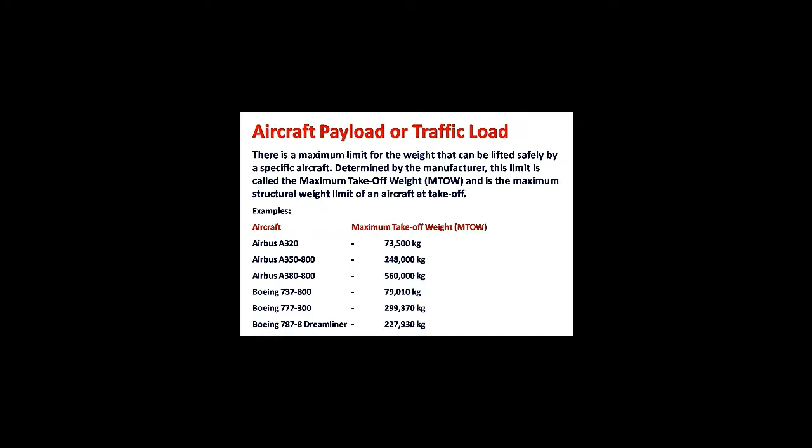There is a maximum limit for the weight that can be lifted safely by a specific aircraft. Determined by the manufacturer, this limit is called maximum takeoff weight (MTOW) and is the maximum structural weight limit of an aircraft at takeoff.

Let us look at the maximum takeoff weight of different Boeing and Airbus aircraft. Airbus A320: 73,500 kg. Airbus A350-800: 248,000 kg. Airbus A380-800: 560,000 kg. Boeing 737-800: 79,010 kg. Boeing 777-300: 299,370 kg. Boeing 787-8 Dreamliner:

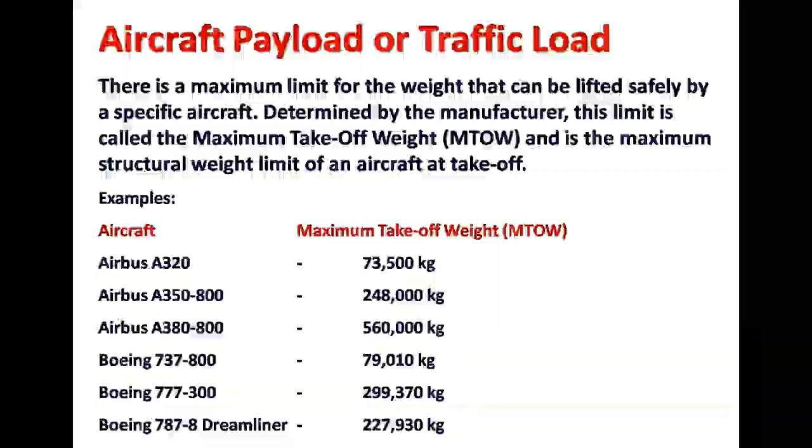227,930 kg. Other structural weight limits of an aircraft are: maximum zero fuel weight is the maximum weight of an aircraft, dry operating weight plus the total load but without fuel, means zero fuel. Now let us look at the weight limits of the aircraft.

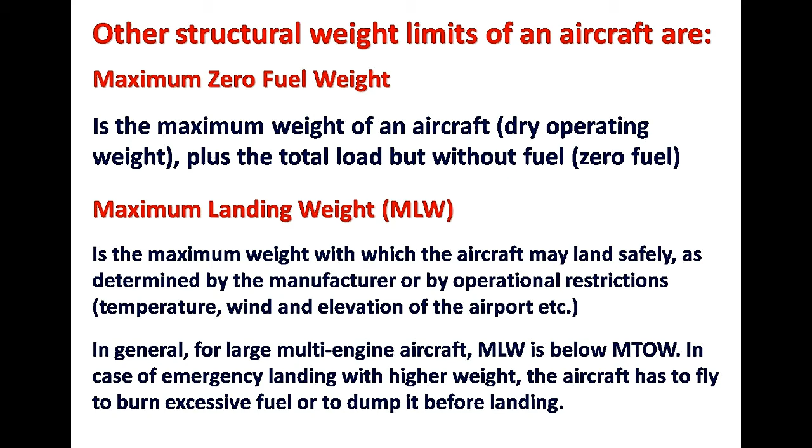In case of emergency landing with higher weight, the aircraft has to fly to burn excessive fuel or to dump it before landing. Now let us look at the aircraft's fuel loads. Ramp fuel: the total amount of fuel on board the aircraft before departure, means taxi fuel plus takeoff fuel.

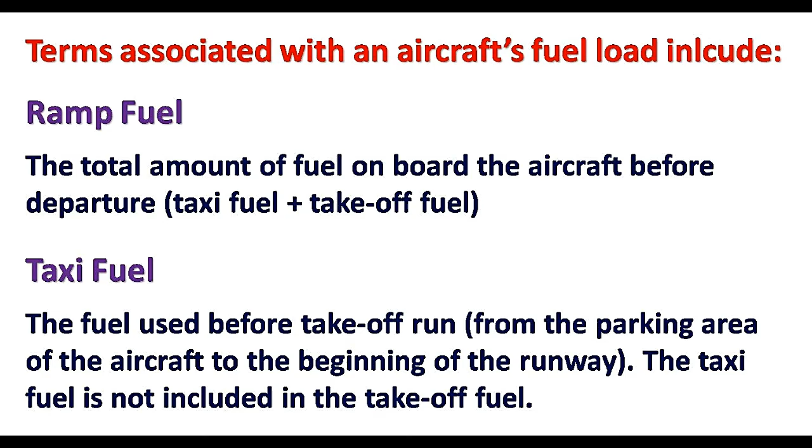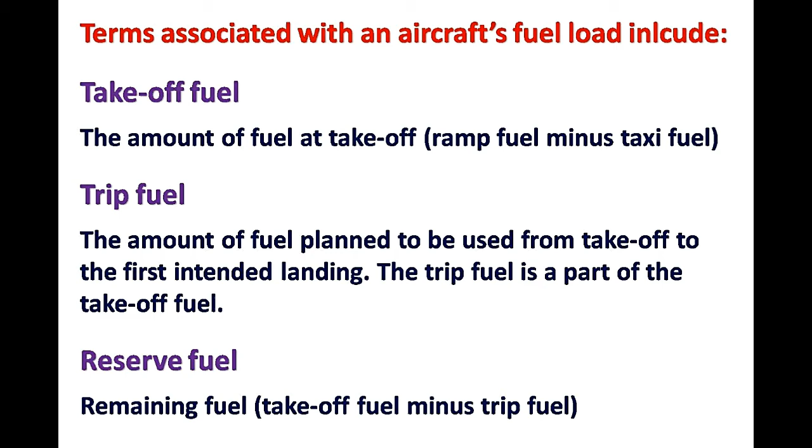Taxi fuel: the fuel used before the takeoff run, from the parking area of the aircraft to the beginning of the runway. The taxi fuel is not included in the takeoff fuel. Takeoff fuel: the amount of fuel at takeoff, ramp fuel minus taxi fuel. Trip fuel: the amount of fuel planned to be used from takeoff to the first intended landing. The trip fuel is a part of the takeoff fuel. Reserve fuel is remaining fuel, means takeoff fuel minus trip fuel.

The maximum takeoff weight can be broken down into the following. 1. Basic weight: the weight of the aircraft as built. 2. Dry operating weight (DOW): the basic weight of the aircraft plus the weight of the crew, baggage and the pantry. 3. Takeoff fuel (TOF): the amount of fuel on board less the fuel used before the takeoff run, means taxi fuel.

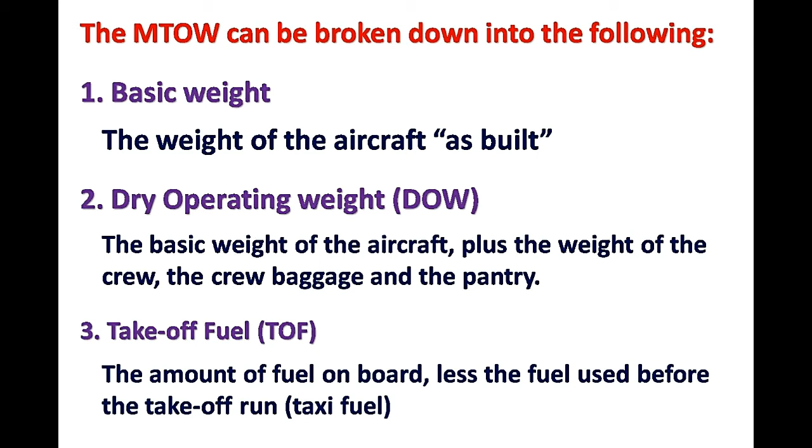4. Operating weight: the dry operating weight plus the takeoff fuel. 5. Payload: the total weight of the passengers, cargo and mail on board the aircraft. 6. Takeoff weight (TOW): the weight of the aircraft before takeoff. The load sheet and load message at departure contain all weight data of the flight and the details of the distribution of the load in the aircraft.

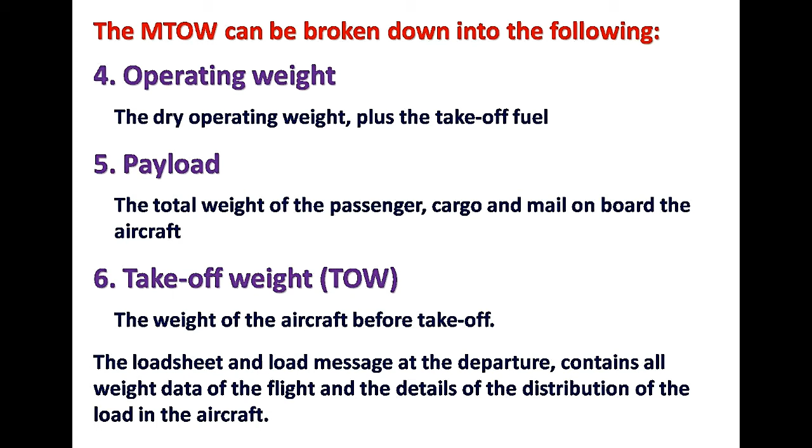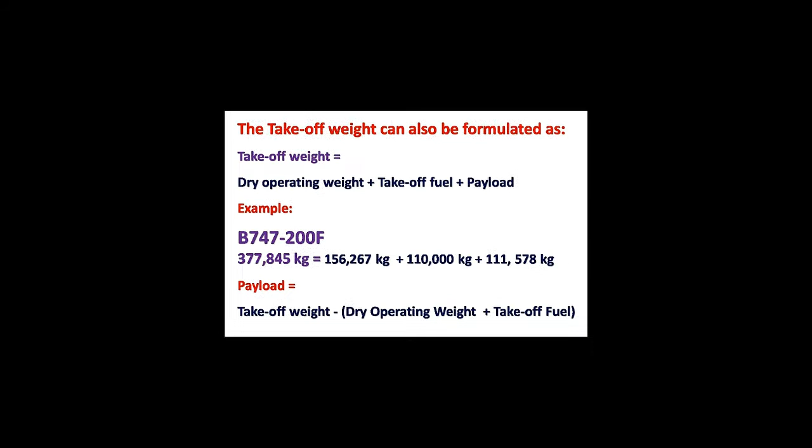Basic weight plus crew and crew baggage plus pantry is equal to dry operating weight (DOW), plus takeoff fuel (TOF) is equal to operating weight, plus payload is equal to takeoff weight (TOW). The takeoff weight can also be formulated as: takeoff weight is equal to dry operating weight plus takeoff fuel plus payload.

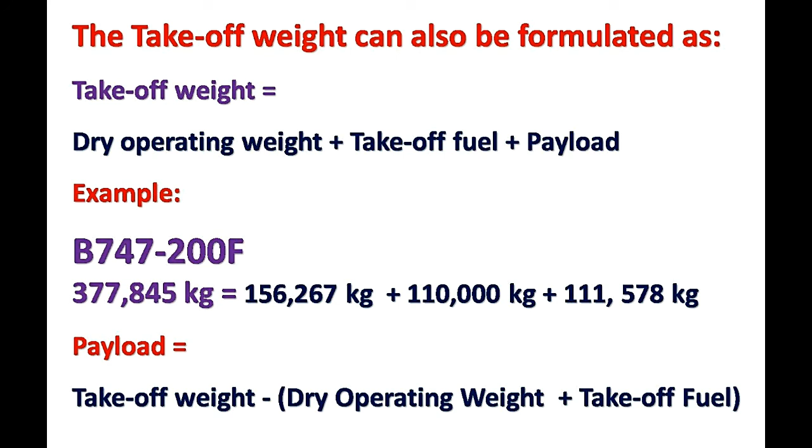Example: B747-200F. Takeoff weight of 377,845 kg is equal to dry operating weight of 156,267 kg plus takeoff fuel 110,000 kg plus payload 111,578 kg. So, payload is equal to takeoff weight minus (dry operating weight plus takeoff fuel).